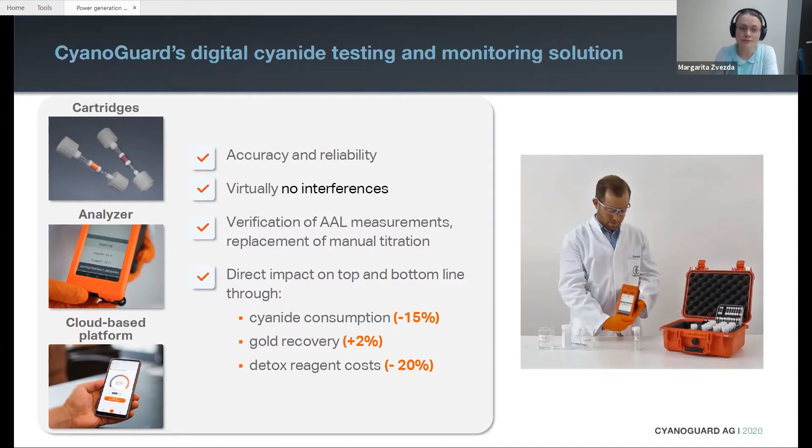With the CyanoSmart Analyzer, the operator can do measurements at any point in the production process. It takes just a couple of minutes. The data, such as measurement result, GPS location, and user tag, are uploaded in real time to the Cyano.io platform, where managers can remotely monitor and control cyanide concentrations.

The CyanoGuard solution is fully digital and can be easily integrated into advanced process control systems at the mine. We support the general trend towards digital optimization of processes at mining companies, because digitalization is vital to achieve sustainable operational improvements and ensure long-term competitiveness.

Data analytics allows mines to holistically improve operations from the crusher all the way to the ADR plant. The value of our solution can also be maximized when integrated with digital process control systems, which provide the infrastructure for advanced data analytics. At this point, I would like to pass the word to Alex, who will share with you ABB's perspective on APC system capabilities when it comes to process optimization.

Yeah, it was some time ago that I met Benedict, and he was introducing me to this new measurement technology for cyanide. And actually, I have to say I was very excited because I understood that by getting more measurement of that parameter, you get basically the foundation for getting this process optimized. And of course, measuring and getting the data to some dashboards is one thing.

Of course, we immediately thought about how could we include that in a control loop, and really use the latest methods in process control strategies to optimize this process.

If you expected us to present a ready-made solution, I have to disappoint you. I will show you a bit more about that. That's not the way it works.

But it's more about exploring together if there is opportunity to really unlock value in a collaborative approach. And collaborative usually means that we need companies and also measurements like CyanoGuard is offering. We need basically also infrastructure and platform for process control to make it work, and a lot of expertise in how to optimize processes.

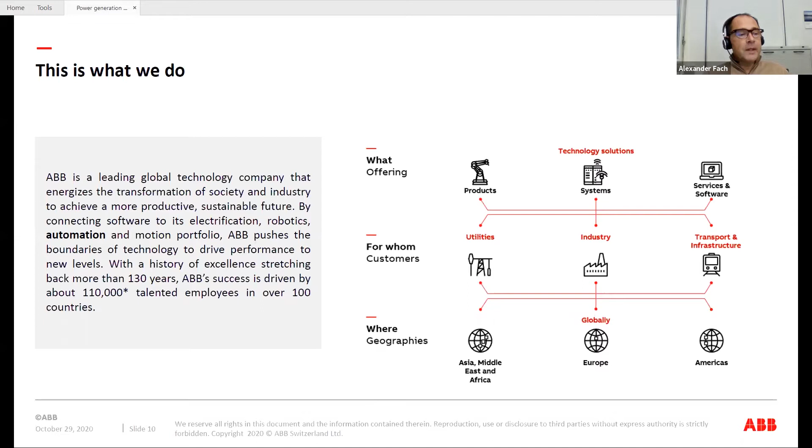On the next slide, you can see a bit more when we dive into ABB. ABB has certain business areas, and when we go to the business area of industrial automation, basically where I am based, you can see just to get an idea about the size - we are talking like $6 billion business per year. And mining is very much in the center of industrial automation for ABB. It's kind of on purpose that this is also the picture in the middle here.

So in industrial automation, we are working with more than 20,000 employees, and we do a lot. We are #1 really in DCS and process automation in this area. We do a lot in measurement and analytics as well. Cyanide we don't have in our portfolio - that's another good reason to team up here with CyanoGuard.

It's a broad offering really, from hardware all the way up to the really latest digital solutions using artificial intelligence methods. So it's basically ABB was growing from delivering hardware to over automation systems, now also in this area of digital.

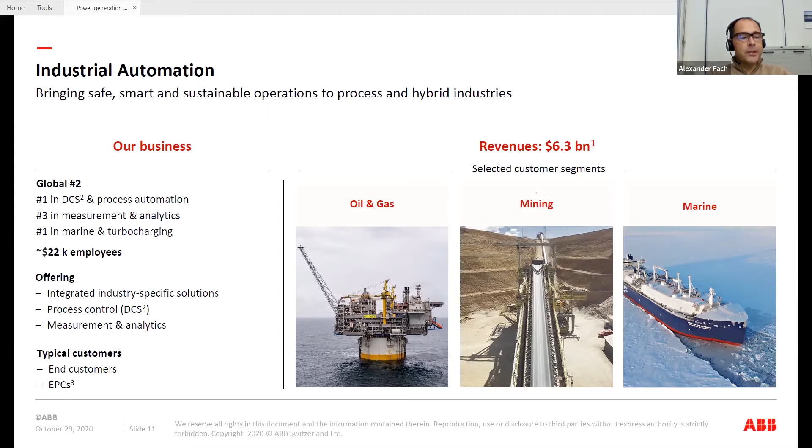On the next slide, a bit more about our references in mining, just so you get an idea of how we relate to mining. We have more than 1,000 DCS systems out in the mining. We have like 1,000 hoists. We have grinding mills, we have conveyor belts.

What you don't see here on that picture is the amount of software systems that we have installed, but that is a huge number as well. And on the right hand side, and that is also a very important piece when we talk process optimization, and I will explain a bit why later, is that we have these remote collaborative operation centers that can help our customers 24/7 on their operations.

And so this is, of course, if they subscribe to this service. So more and more it's also about really providing the needed support and service and not just delivering something and then leaving the site.

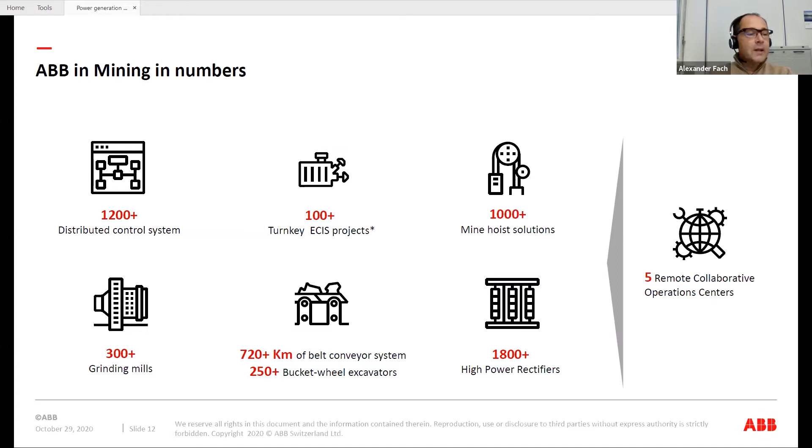Now I would like to talk a bit about the ingredients that we need for a successful process control and optimization. On the next slide, please.

What some people claim is that there's so much data already that you don't have to measure more, and you can extract a lot from your data to optimize your operations and process. That's kind of true, you can do a lot, but if it's about really controlling a particular process, accurate, reliable and frequent measurement is a key ingredient to proper process optimization.

Furthermore, it needs an infrastructure to collect signals and data and process it. It needs modern tools for data analytics to gain more process insights.

Because what a human can do is have their ideas of how things work, but there is another truth in the data that you can read out with number crunching tools and algorithms, to see dependencies you weren't aware of without having these data insights. That is also something very much needed.

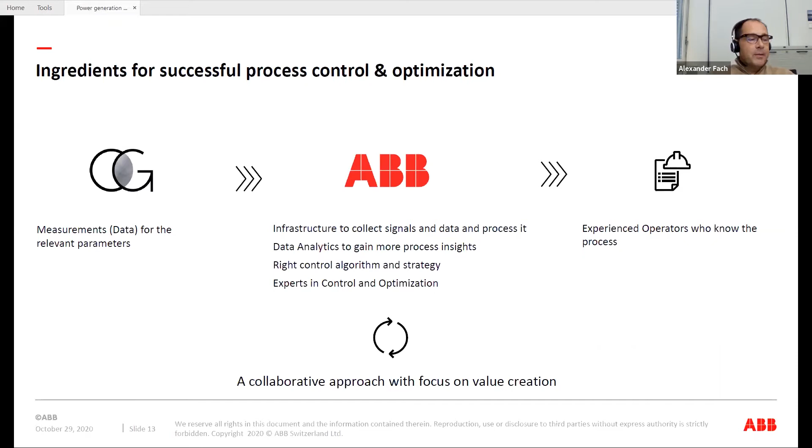So let me now talk a bit about advanced process control. Typically what you want to achieve is maybe reduce your energy consumption, reduce the use of reagents that might be expensive, like cyanide, and at the same time maximize your production. You often have targets to increase throughput and reduce production variations to stabilize quality.

And then it's also a lot about the environment, because when you have a better process that's more optimized to the outcome you expect, that has in all cases an impact on the environment.

Our solution—we have shown examples of a wide variety of APC solutions in mining, where we can really show significant benefits that we deliver, and I'll show later an example that turns into dollars you can count.

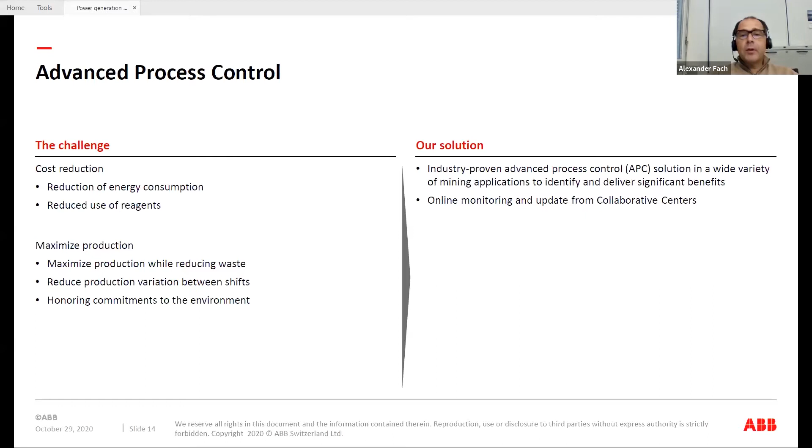So when we go to the next part, a bit more particular on what it is and how it works, in a more abstract way, you could say it's kind of an autopilot to drive the plant to an optimum stage.

It basically automatically changes the set points for the process parameters, and typically what's achieved is that the variations during the process, from batch to batch or from process to process, are reduced by making smaller steps in adapting the parameters rather than a few big ones, also because it runs automatically.

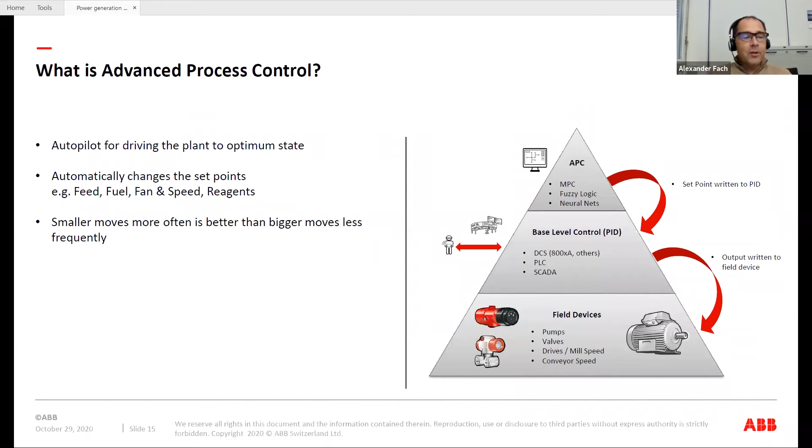On the next slide, I would like to show an example, technically, of what happens with these control strategies and what they can do. Typically when you have a process, you have some limitations, some kind of boundaries that you should not go above or underneath. When you have bigger process fluctuations, as you see on the left side,

you cannot bring your set point lower in this case, because in some cases you would leave the limitations that you have for your process parameters. The first step, with these control strategies, is to bring those fluctuations down, making it

more precise, following the optimal stage of the process. By reducing the fluctuations, within your process window, you can put the set point to an area that makes you more money. That's basically what we try to do - put something in place that improves the financial KPIs.

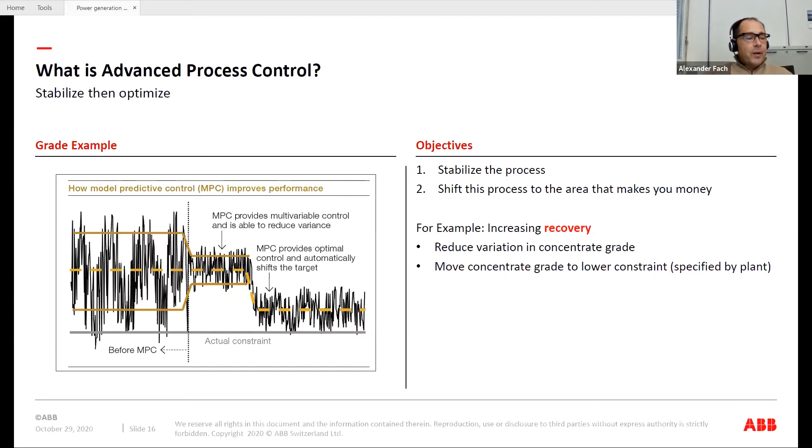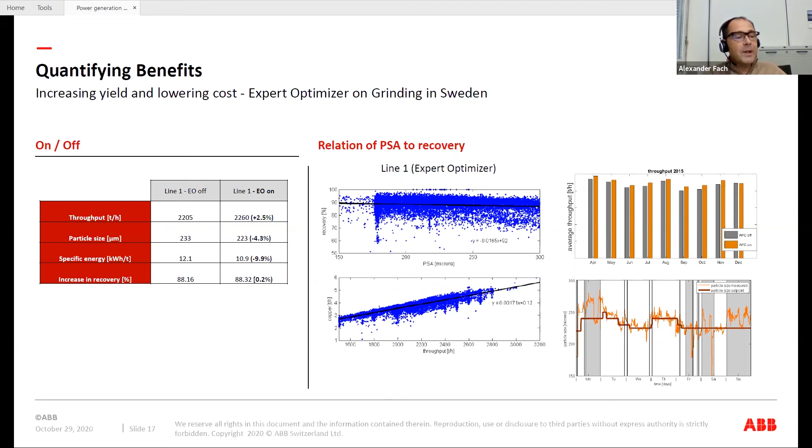When we go to the next, yeah, it was that one. That's basically another example where we developed an APC for a customer in Sweden where we could increase recovery by 1%. You can imagine this is huge in terms of money. 1% doesn't sound like much, but the question is, 1% of how much? And this is huge. Usually in this industry—and that's also why I really like working in it—you can achieve huge benefits and create huge value with those kinds of optimization methods.

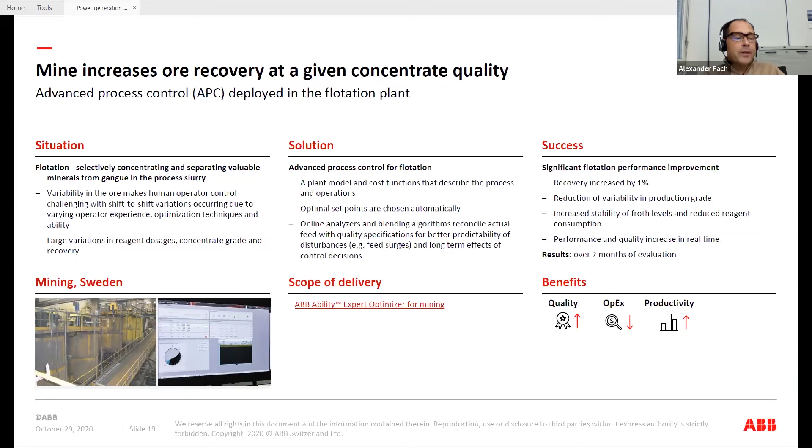When we go to the next, I'd like to tell a bit about the evolution of APC in general. The concepts have been known since the 80s, and there have been productized solutions developed for mainstream processes like cement, where you can more or less buy a piece of software when you get your automation system. You apply that because your process is so uniform compared to your competitors and also to the ones in maybe other plants of your company. So that was kind of the starting point.

The problem is that you basically commission that advanced process control by tuning your algorithms and parameters. Then you deliver that as a piece of software, and then you leave—and we as ABB left too. Then after a year or so, if you come back and ask how it's working, you often get the message: we switched it off. Because it didn't work anymore, or didn't really bring results anymore. So the switching off can have different reasons.

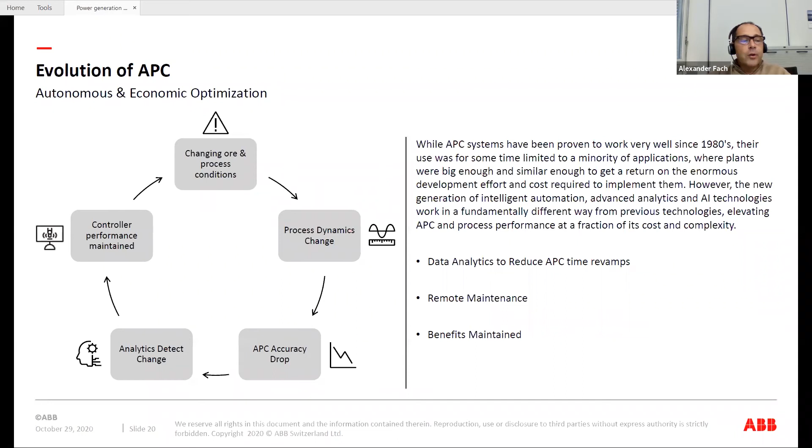Okay, I was talking about this before a bit also. It requires infrastructure. I mean, one thing is to have clever algorithms, but you need infrastructure to run those algorithms somewhere, and you need a platform to collect the signals and the data. That's why I wanted to show you quickly our portfolio in overview, where I highlight in red the infrastructure pieces that are needed to make a solution work.

What we have to mention here is this Expert Optimizer, which is the product name for our APC offering. We also have the automation system - you can use an 800xA DCS environment from ABB to run your APC on, including even the hardware that comes with that platform.

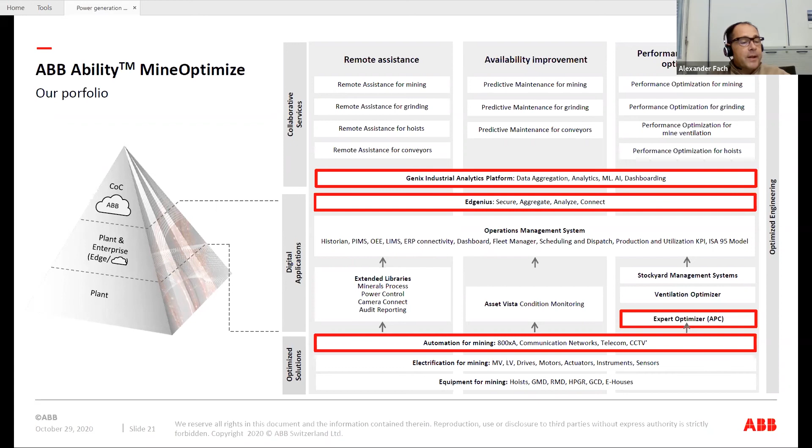So that's a bit about our portfolio here and how that works together. Given the time, I skipped the next two slides - that was a bit more about the Genix, but you can read that all on our webpage if you have more interest in what the features are.

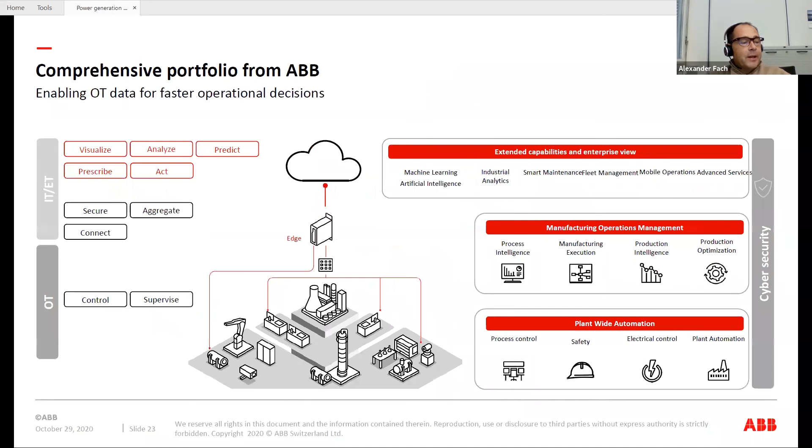I would like to go directly to the takeaway messages I'd like to give you once more. We know by experience that in these mining processes there is a huge potential for optimization when you apply modern technologies - APC, data analytics, and the combination of that. I really encourage everybody to look into that, because we have the experience and it's really huge money that you kind of waste by not applying those methods.

These things need infrastructure, so you need software and even hardware to make it work. There is, for those kinds of things, also our webinar invitation - the title might give a bit this impression: there are no ready-made solutions, but there are companies like ABB, and we know that we can make it work. A really ready-made solution would not then work for the next customer case. All those solutions are worked out in a collaborative manner where all the stakeholders are included.